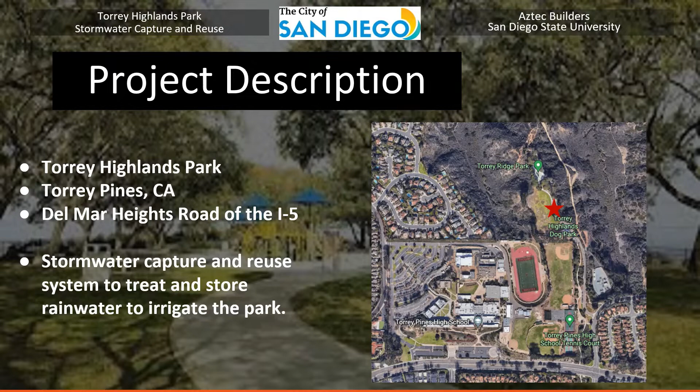This park sits on a 360-foot elevation plateau with steep gullies on the west, north, and east edges. The Torrey Pines High School baseball field marks the boundary to the south. Surrounded by native plants and a gorgeous view of the canyon and adjacent neighborhood, this has become a favorite location among Torrey Pines residents to breathe in the fresh ocean breeze air and catch some vitamin D.

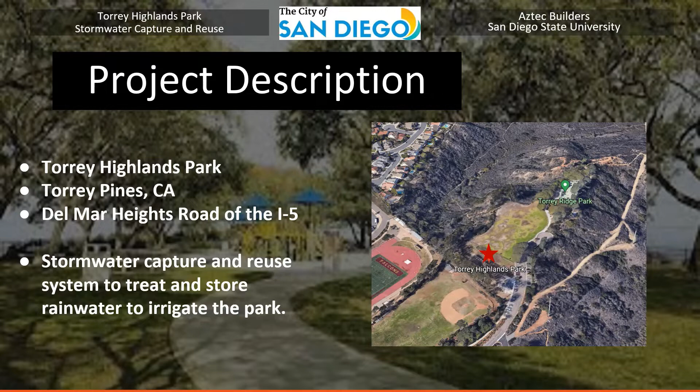The objective of this project is to design an efficient, sustainable, and cost-effective stormwater capture and reuse system that will treat and store rainwater to be used for the irrigation of the Torrey Highlands Park. By designing a durable, long-lasting system, reusing stormwater that would be wasted otherwise, and helping the park conserve water, this project will emphasize sustainable development and economic efficiency.

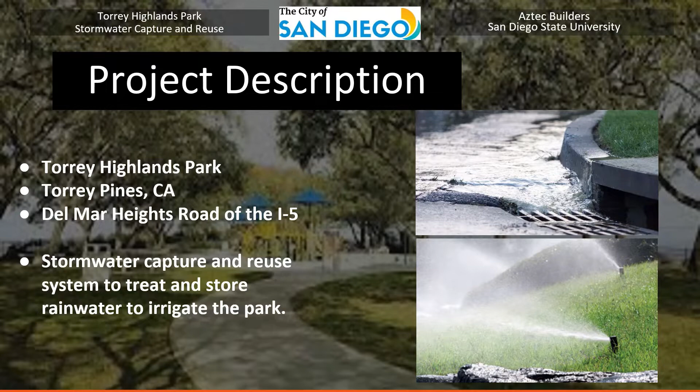My name is Tazio Rosenberg, environmental engineer for Aztec Builders, and I will be discussing the design approach and the hydrology study. For the design approach, Aztec Builders wanted to address cost, efficiency, minimizing the impact on the park, and sustainability. A low construction cost would lead to a cheaper design, which would make the construction of the park much more feasible. An efficient system would have low maintenance and operations costs, which would also help keep the costs of the park low.

Minimizing the impact on the park was a priority for Aztec Builders because we wanted the park to remain operational throughout the construction process, and we also felt it was very important to address sustainability throughout the design because we wanted to maximize the positive environmental impact that this design could have on the park.

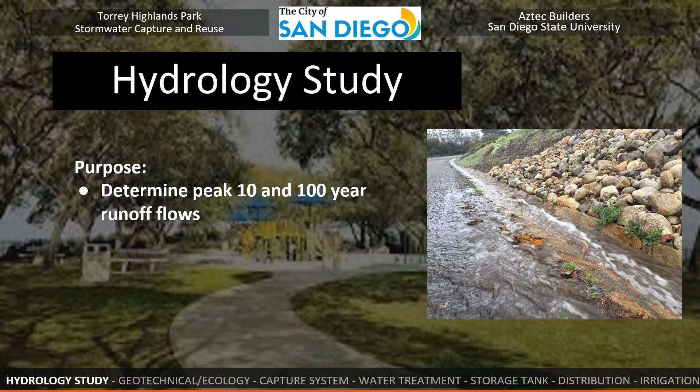The hydrology study was performed as per San Diego County hydrology study guidelines to determine the peak 10 and 100-year runoff flows of the park. The study was performed with existing topography data, rainfall intensity data, and cover material of the park. The applications of this hydrology study were widespread and important throughout the design process. Firstly, it helped determine the type of collection system that we would use.

The hydrology study determined where runoff could be collected, which helped determine what type of system Aztec Builders wanted to put in place. It also helped us determine the irrigation needs of the park, which was important for storage tank sizing, because the hydrology study determined infiltration data, which determined how much extra water we would need for irrigation. The hydrology study was also important for sizing the system for both treatment and pipe sizing because it determined the flow rates that we would need to have throughout the system.

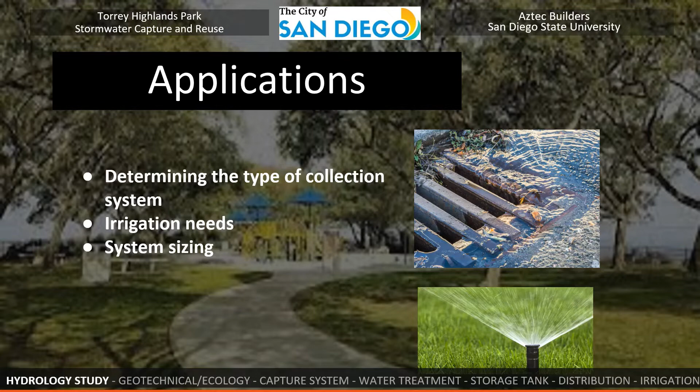Hi again, my name is Katie Reitman, project manager of Aztec Builders. I'll be discussing the geotechnical and ecological study of the project. By exploring the existing conditions of the soil composition and ecology, the purpose of the study is to determine a safe excavation depth and the water requirements of the landscaping that will remain in place. The objective is to provide options for the most cost-effective design of underground structures while maintaining the current beauty of the park and reducing water usage efficiently.

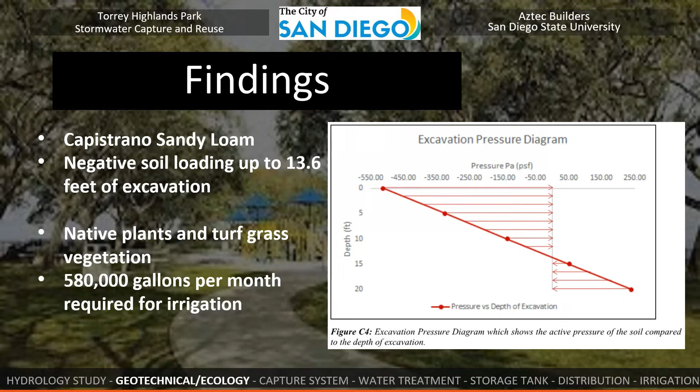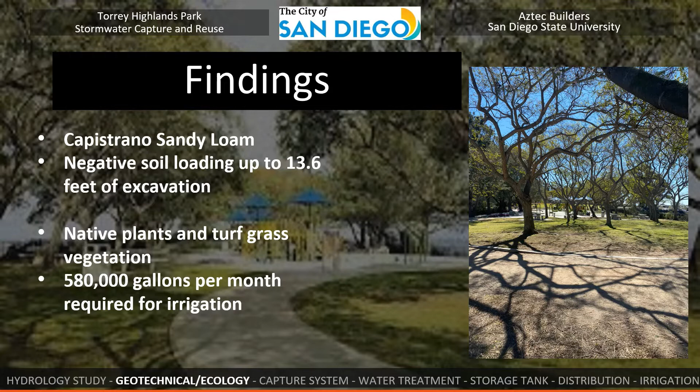A geotechnical evaluation revealed that the site contains a sandy silt soil known as Capistrano sandy loam. Based on the soil type and other characteristics, it was determined that the site can be safely excavated and that the underground structures could be subjected to additional loading if the excavation depth exceeds 13.6 feet. An ecological evaluation of the vegetation on site also revealed the park's water demands. It was determined that approximately 5 acres of the park will require irrigation, and it was calculated that 580,000 gallons of water per month will be needed to meet the park's irrigation needs.

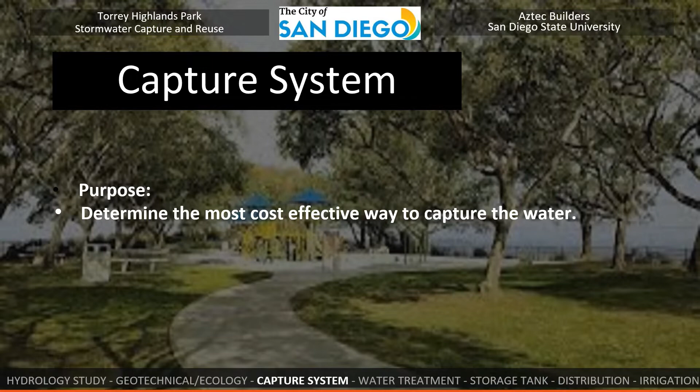My name is Hamoud Al-Juma, civil engineer for Aztec Builders, and I'm going to focus on the capture system. Our priority for the capture system was to maximize the stormwater collection while minimizing the cost. Aztec Builders found that the current stormwater capture infrastructure had the capacity to capture 87% of the available runoff. And to capture the additional 13% of the runoff collection, ditches would need to be constructed along the northern edge of the park.

Aztec Builders recommends retrofitting the current storm drains because retrofitting the storm drains is the most cost-effective way to capture the water. Not only does it require little construction, it also requires no power input to move the water to the treatment system. This capture system also easily captures enough water to exceed realistic storage capacities.

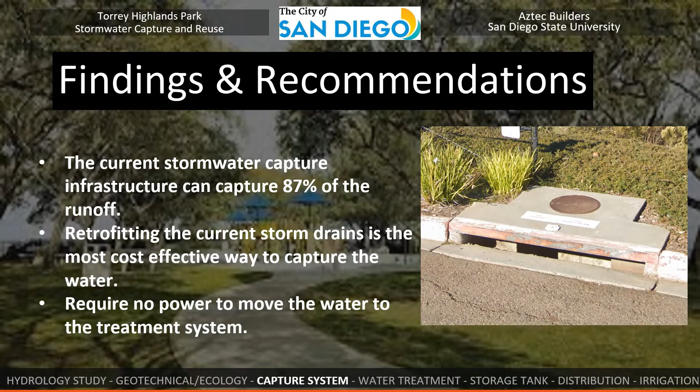Hi, my name is Carlene Masser, and I'm an environmental engineer who focused on the water treatment design portion of the project. The purpose of this section was to determine the anticipated pollutants of concern within the stormwater, to determine the treatment requirements for using the water for irrigation, and to design an efficient and cost-effective stormwater treatment system.

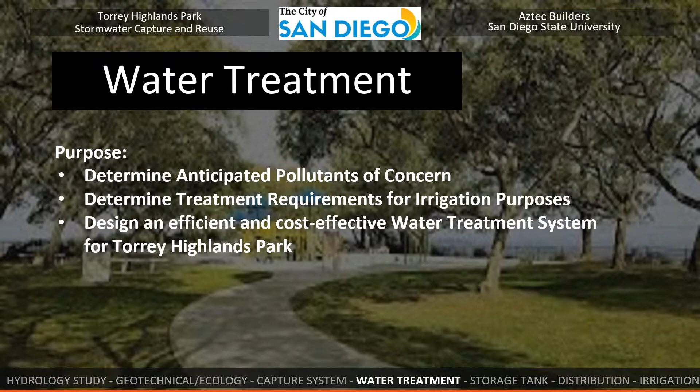Based off of the location of the park, it was determined that the pollutants of concern will likely be sediment, debris, and pathogens from dog waste. When researching the treatment requirements, it proved to be a legislative gray area, and thus flexibility within the system is important due to the fact that these requirements will likely be updated soon. And when designing the water treatment system as a whole, it was sized based off a 10-year peak flow rate.

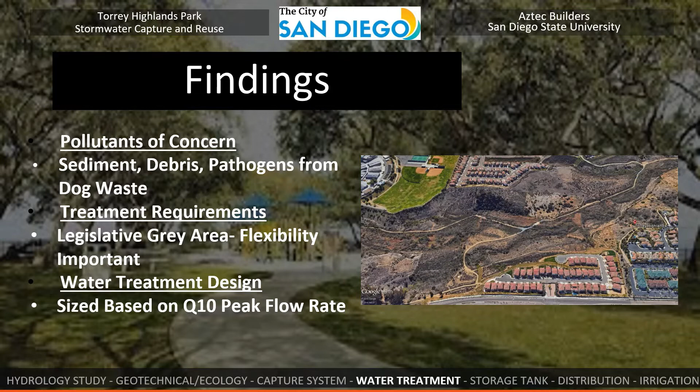To handle this peak flow rate, Aztec Builders recommends this prefabricated vault system from Fabco Industries. The system, along with its dimensions, is shown here on the left. And the unique aspect of it is that it includes cartridges that target specific pollutants, and thus the treatment train can be tailored. And Aztec Builders recommends the red standard cartridge and the yellow pathogens cartridge.

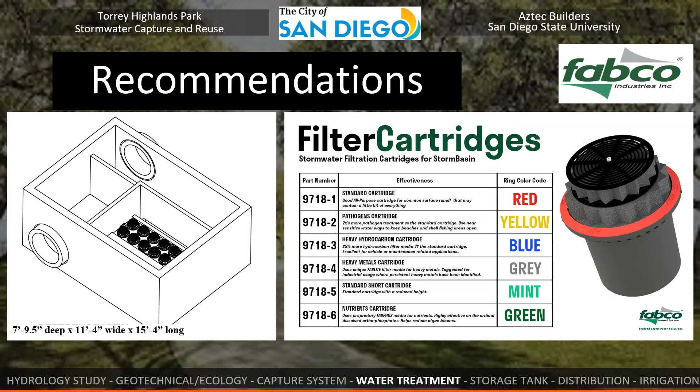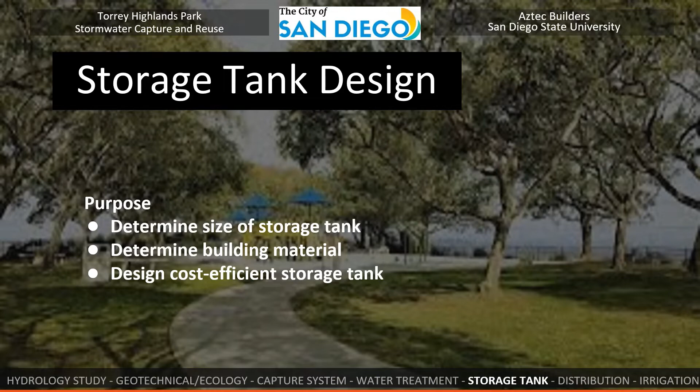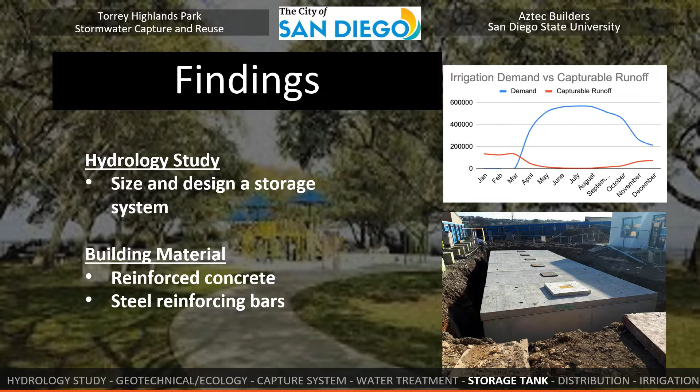Next, the building material that will be used is reinforced concrete and steel reinforcing bars due to its rigidity, ability to resist loads, soil pressure, and long life cycle as shown in the figure below. Based on a cost-benefit analysis, Aztec Builders recommends approximately 65,000 gallons, which when converted into feet, would be 9,000 cubic feet of reinforced concrete of the storage capacity for Torrey Highlands Park. Based on the calculations that were made, the storage tank dimensions for the 65,000 gallon is 45 feet long by 20 feet wide by 10 feet deep tank.

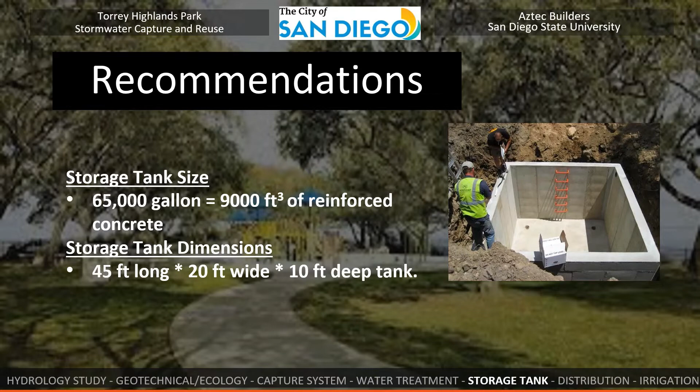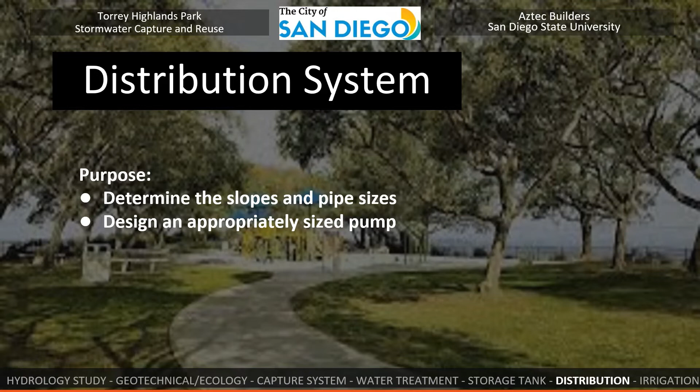My name is Ibrahim Al-Attar, a civil engineer for Aztec Builders. I'm going to discuss the distribution system. The purpose of the distribution system is to design and control the water flow for the system and to have an accurate measurement of the pipes and pump size to supply the irrigation system of the park. After a careful look to the project location, we found that there are 3 existing drains that will help us reduce cost for both design and construction, as well as pipe sizing.

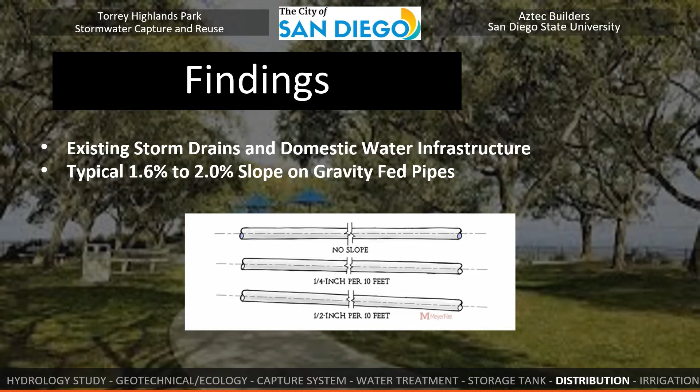Also, we found out that the gravity-fed pipes have a typical slope of 1.6 to 2% that will be considered for the design. Aztec Builders' recommendations are utilizing the findings in the park, so pipelines will maintain a 1.6% slope for each gravity-fed structure, and all new structures will be within a close vicinity of each other to reduce pipe costs and maintain our target slope. Lastly, a 2 to 5 horsepower sump pump will be used in the system for the best water flow and pressure from the underground water storage to the irrigation system.

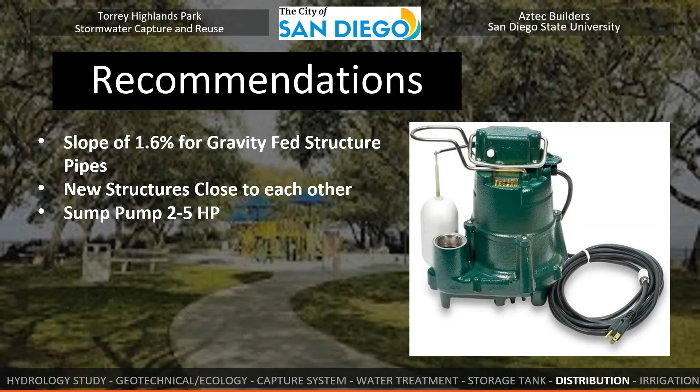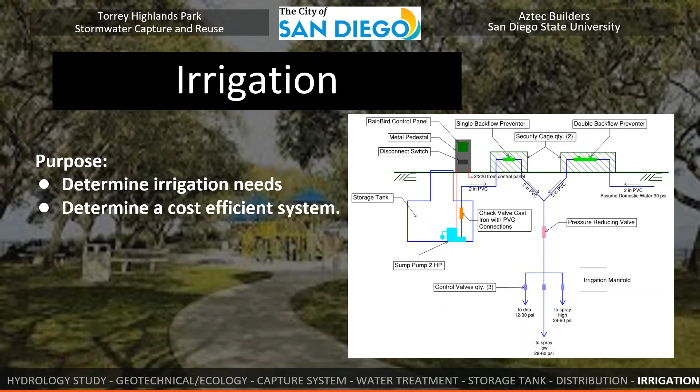My name is Ahmed Alisa, civil engineer for Aztec Builders. I will be discussing the irrigation system for the park. The water requirement for the site is 581,848 gallons per month, which was determined using the water budget tool. We also found out that the hottest months of the year are from May to October, and we will need to water the plants fully in these months. Other months like January, where the average precipitation is 2.52 inches, we will need to stop the systems from watering since there is enough water from precipitation.

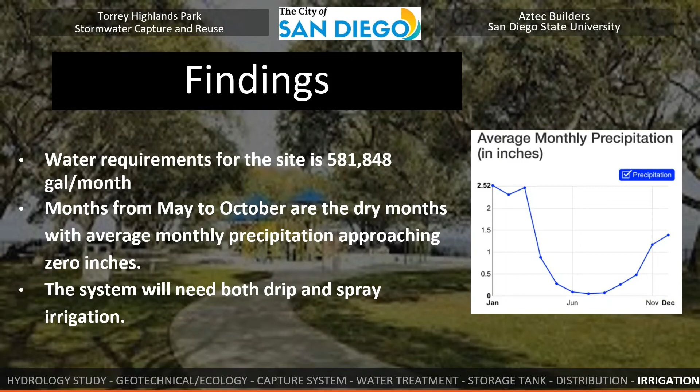In order to make the most efficient system, we will need both drip and spray irrigation. Aztec Builders recommends replacing parts of the existing sprayer with drip irrigation, which will be more efficient and could save nearly 19% of water. Aztec Builders also recommends using the Rainbird control. It allows us to control multiple systems in one control, which will be useful in the months with high precipitation.

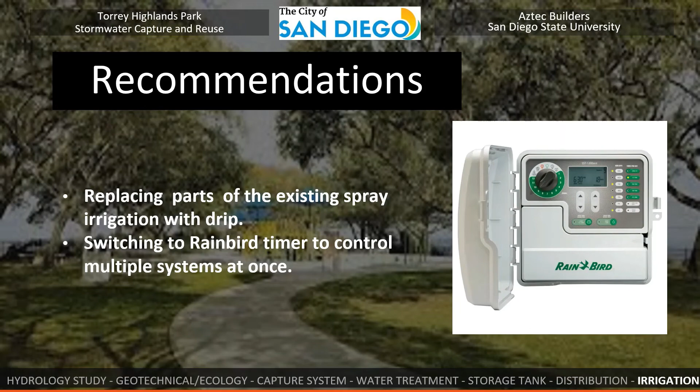In closing, a hydrological study determined the quantity of rainfall available for capture. A geotechnical and ecological study evaluated the existing site soil conditions and the park vegetation's water demands. Subsequently, an efficient capture system was explored with the goal of capturing as much stormwater as possible for a reasonable cost. To ensure the safety of both park visitors and the environment, a water treatment system was implemented to treat the stormwater before it is used for irrigation, while adhering to City of San Diego guidelines.

With the goal of storing enough stormwater to irrigate the park during non-rainy months, a storage tank was designed based on the site constraints, practicality, and cost. The distribution system among each of these elements provided the appropriate slopes and pipe sizing. And lastly, a cost-effective irrigation system was redesigned for the most efficient use of water for the park. With each step, cost, sustainability, practicality, and environmental impacts were at the forefront of Aztec Builders' considerations.